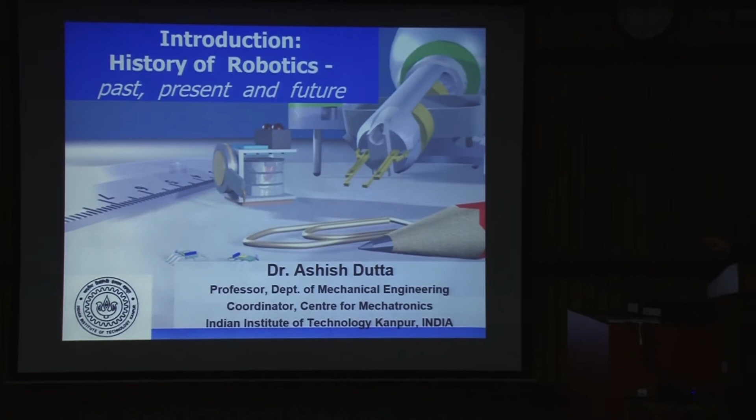Introduction to robotics: past, present, and future. There is a lot of talk of robotics, this word robot is used extensively. You look at TV, newspapers, there is always something or the other to do with robotics. Now it's very interesting to note that when somebody uses the word robot, or you read the word robot somewhere, what is it that first comes to your mind?

Each of us has a different perception. Some people will think they are mechanical machines, some would think they are companions or friends, some will think they are pets and toys like this. Some would even say helpers, some will say dangerous machines. So maybe all of this would come to your mind.

It's very interesting to note that as time has progressed, our concept of robotics has also evolved. In the 1960s and 1970s, there were mechanical machines doing jobs in industries. Then a little more advanced, we have robots which are friends and companions. You have robots today in other areas also: social robotics, companions, friends, pets, toys, helpers. May not be so much in India, but in other countries, helpers are already there, for rehabilitation and so on. Then there's another one becoming very common: dangerous machines, for example automatic weapons, drones. These are all robots, and they are dangerous machines. So depending on what you're thinking of, something specific comes to mind about robots.

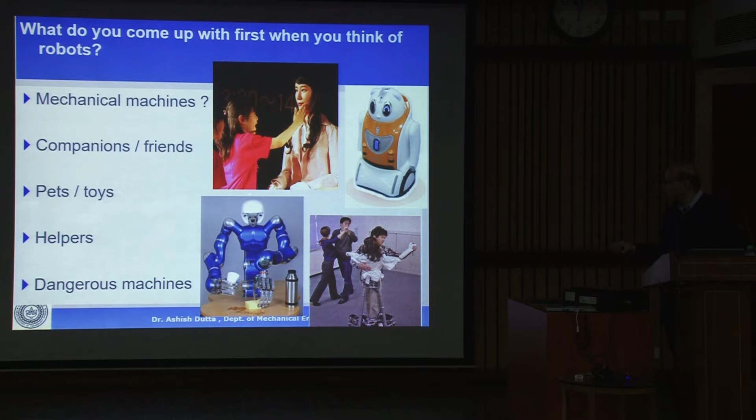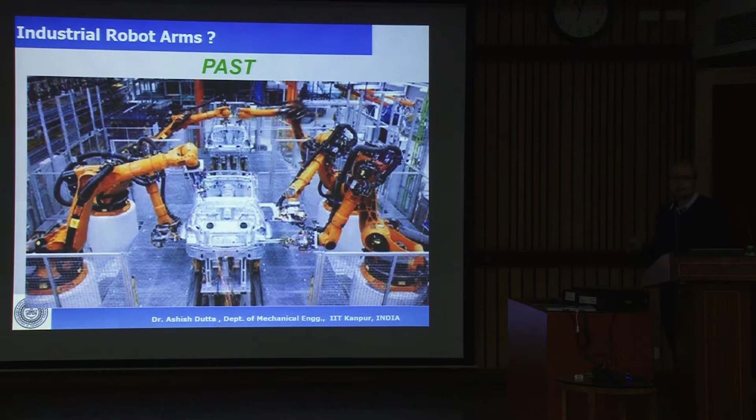Now this business of robots has moved on from the past, present, and future. Why this is important: the past is where it came from, this is industrial robotics from around the 1960s, 1970s. A lot of robots doing a particular task in an industry like the automobile industry or electronics industry. This is the past. Robots were essentially used to replace human muscular power in industries. And then this is the present.

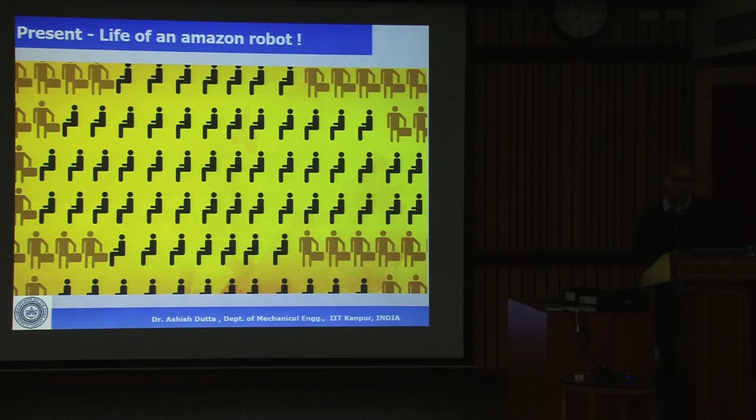The present is basically Amazon. Unfortunately the video is not playing, but anyway, the present is basically Amazon. You might have seen the video. In Amazon robotics, there are robots which are used almost everywhere, right from material handling to other tasks.

I insisted on showing this video because it actually shows that we are connected to robotics in almost every way. We might think robotics has nothing to do with us, that it's just some subject somewhere. But if you look at Amazon today, or most online retail services like Amazon, Flipkart, and others which we are using, all of you would have used Amazon or Flipkart in some way. Now the material handling in this automated online retailing is completely automated. This is the present, and this is also the future of retail.

So we are all connected. When you buy something on Amazon, you place an order. The order is processed automatically, and then from wherever the product has been placed, it is retrieved automatically by using a robot and then dispatched to you. The full process is automated, and this is where we talk about robotics in terms of motion planning, material resources, material planning, and delivery.

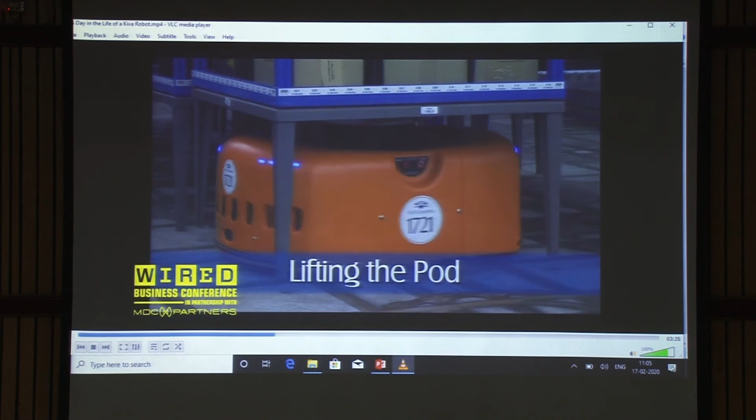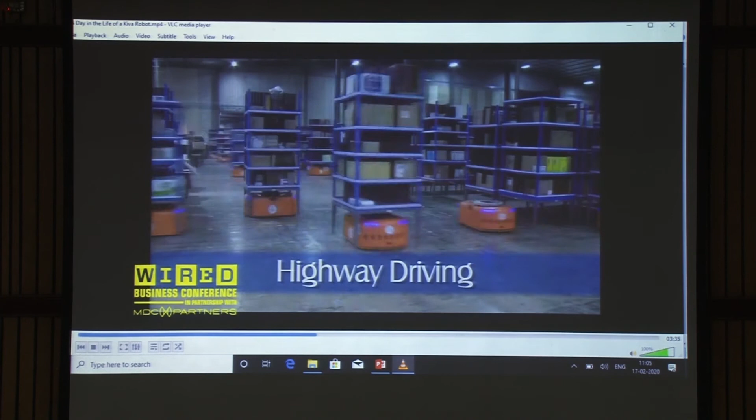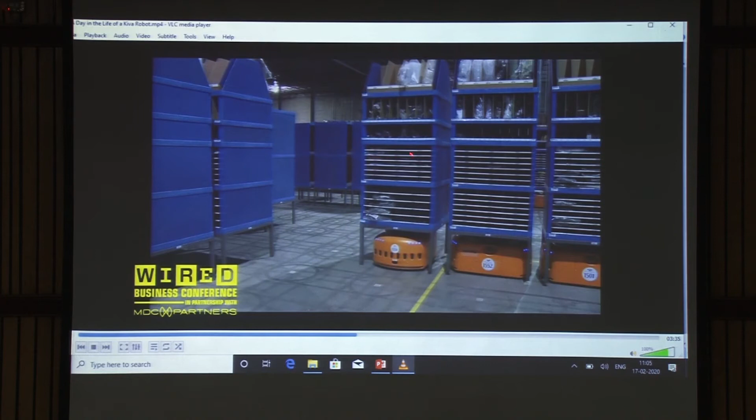Now this has to do with mobile robots, it has to do with motion planning. You can look at the design of the robot which is essentially retrieving the part. In terms of motion planning, there are about 3,000 robots working simultaneously. Now if there are 3,000 robots working simultaneously, how are you going to do the motion planning? Obviously it has to be the fastest, you have to have a plan such that the robots don't hit each other, and it must give you the fastest delivery time.

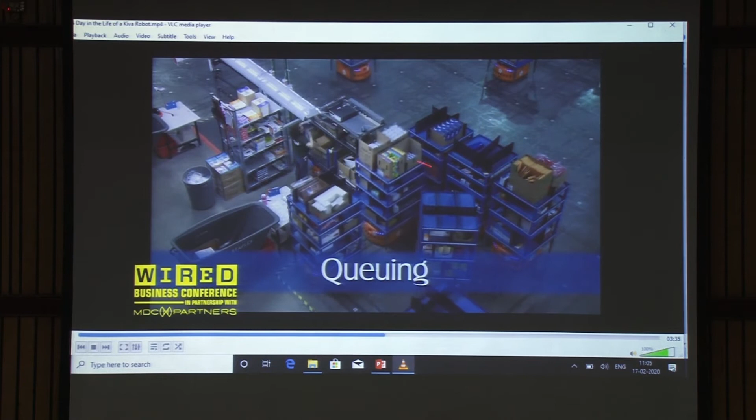So this is something we may feel we are not connected to robotics, but we are in a way connected, because the product coming to you is actually being automated and given to you. In terms of retailing, this is the future of retail. So what the human being will do is only take the part, put it in the packet, and give it to you. The rest is completely automated. This is the present, and it's likely to be the future also. So we are all connected to robotics in some way; we don't see it directly, but it's already there.

So I insisted on showing the video because this at least convinces people that yes, we are connected to robots, and this is the way forward.

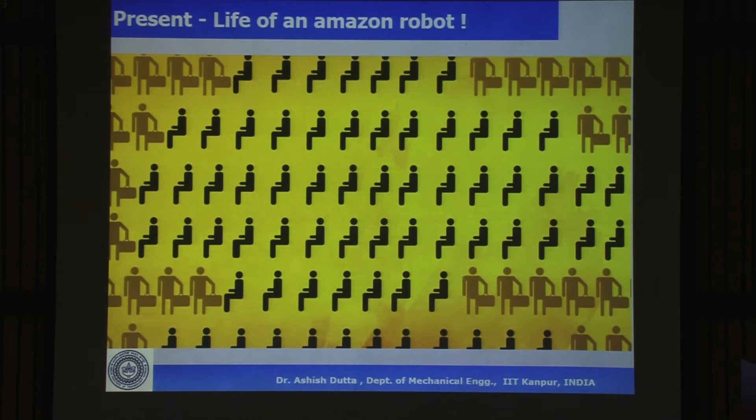So the past was this, the present is this, Amazon, retail, et cetera. Now in terms of the future, many countries already have concepts like social robots, robots living in society, in rehabilitation, healthcare, hospitals, airports, giving directions, as helpers, teachers. These are already there in so many places. So this is the future, this is probably the direction in which robotics is going to go, from industrial applications to online retail to the direction of social robotics, where robots are actually going to come and live in society.

Now essentially robotics is not only a question of looking at kinematics, dynamics, control, motion planning. Other aspects like behavior have also come inside. What should the robot look like? Should the robot not look like you? Should the robot look like a human? Should it not look like a human? Should it behave like a human or not like a human? Which things were not there before?

It's there today. So in robotics, all kinds of people have got involved. Apart from the engineers, we have people from social sciences, from humanities, from psychology. Everybody is included in robotics today. So robotics has actually become a very, very large discipline by itself, and that is the direction in which it is going.

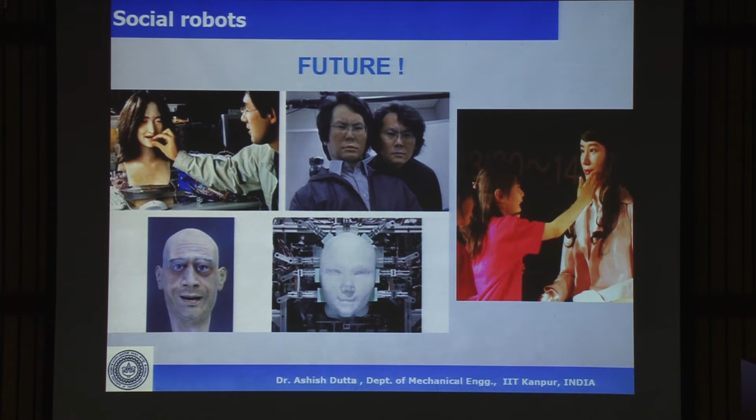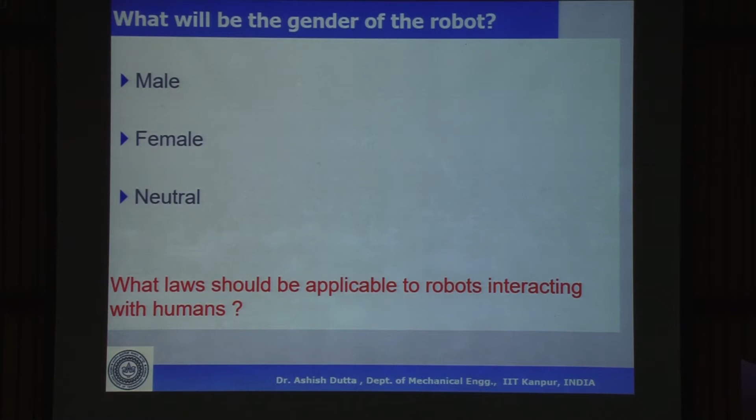A lot of interesting questions have come up which never existed before but which are there today. For example, when you think about a robot, what will be the gender of the robot? Will it be male, will it be female, or will it be neutral? These questions did not make any sense, say, 20 years ago. But today it makes sense, because if there is a robot that you're going to buy, or that is going to be there in the airport or in the hospital, then what should be the gender of that? Will this ever come to your mind? So these kind of things make sense today, which were not there before.

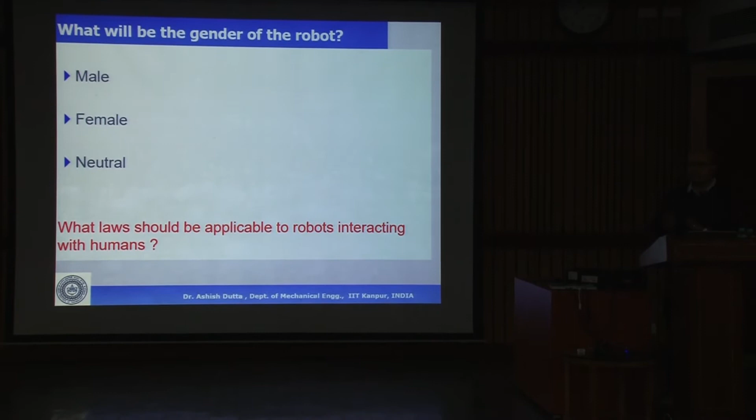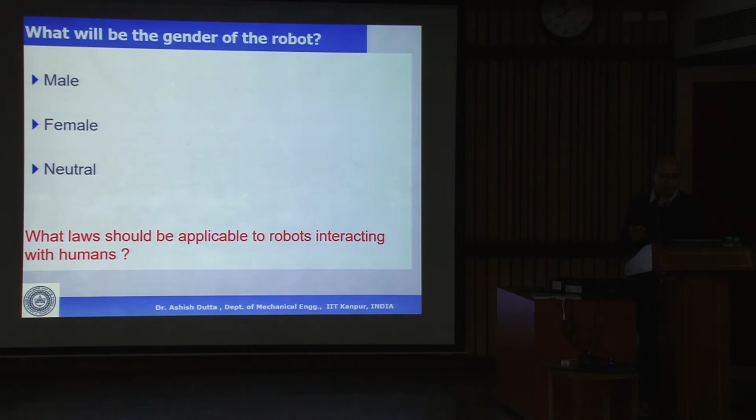So this discipline is progressing, and it is likely to go on for the next 20 to 30 years at least, where we are going to automate a lot of services and industries. So what we'd like to know here is, in terms of teaching, we should be very clear where robotics came from, where robotics is going, and what is the future of robotics. So what we'll be trying to cover is where did robots come from, where we are in terms of robotics, and where robotics is going.

Why should we know this? Essentially because when you're doing research, you should be very, very clear about what the research is going to be in the next 10 years or 20 years. So starting off from the very basics of this course, that is the origin of automation.

So robotics is a part of automation. And what is automation? Again, these are terms we use very commonly. When we say automation, home automation, industrial automation, what is this automation? The definition of automation is essentially replacing human muscular power. So robotics is a part of automation, and automation is the process of replacing human muscular power. So we can have office automation, home automation, all kinds of industrial automation, and today we have retail automation.

So the objective is essentially replacement of human muscular power, and this business of automation has been going on for thousands of years. It is not that anybody invented automation, this is a process which started off very long ago. For example, 10,000 BC, in the early days, human beings used different kinds of tools. We had copper tools, stone tools. Initially it was stone tools, then copper, then iron, in that order. So tools make better tools.

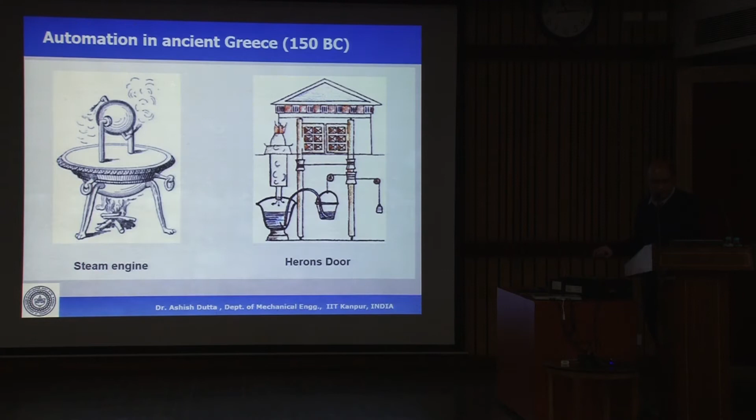In 1800, in terms of progress, we saw the manufacture or design of automatic power looms in France. For example, this gentleman called Joseph Jacquard invented the first textile machine, or the programmed textile loom, for design and manufacture of textiles, that is, clothes. Even today we use this kind of device when the weaver weaves.

You would have seen there is a structure like this, with threads which go in this direction, and threads which come from the top. So how does the weaver actually make the design? By changing the position of the threads coming down, the person makes the design in the cloth. This is the way it is done even today. You would have seen on TV very often: there is a bar like this, and the person holds the bar and pulls it down, changing the position of the threads, and that makes the design on the cloth.

So what this gentleman did is that he embedded the design that was to be made on the cloth in the form of a program which he wrote in a punch card.

So this punch card is something similar to our OMR sheets of today. In this punch card, there would be lines, and each line will have circles. So there is a hole or there is no hole. And there would be a reader which can read that. If there is a hole, probably it means 0.

If there is no hole, it means 1. Either way, this is something similar to the cards we use today, the OMR sheets, where you make a circle, make it black or don't make it black, and there's a reader which reads that.

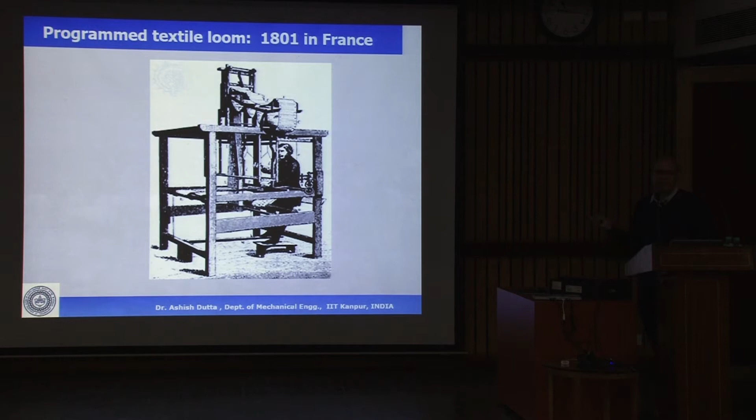The program made for having this textile, making the design on the textile, was written in the form of a punch card. This machine could read the punch card and correspondingly change the position of the threads. This is the earliest example of a program device. The early machines, computers and NC machines, also used this punch card in the earlier days. So in terms of program, the earliest example is probably around 1801, in the form of textile machines.

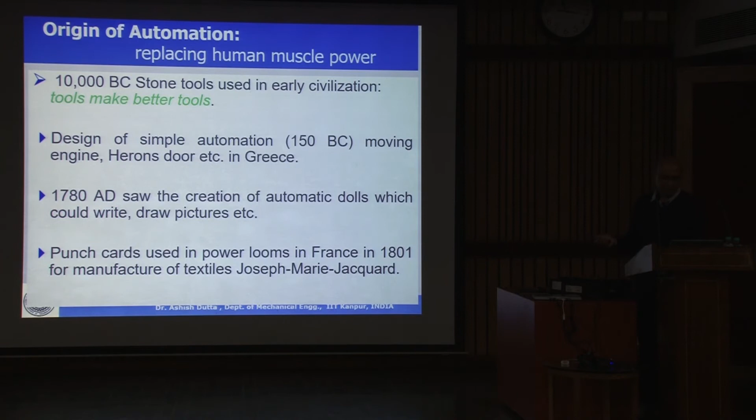Now we move on further. 1904, essentially, there was an idea of using transfer lines. This first came out in the Ford Motor Company in the US, 1904. So what we are trying to see is historically how this subject of automation has changed, and where robotics came from. This is all hard automation till now.

1904, Henry Ford's mass production of vehicles in the US, and even today we use this concept of transfer lines. There is a conveyor, there is a car which sits on the conveyor and it moves from station to station. At every station, a human being or a robot will do something, and then the car moves on. So the idea of a transfer line was 1904.

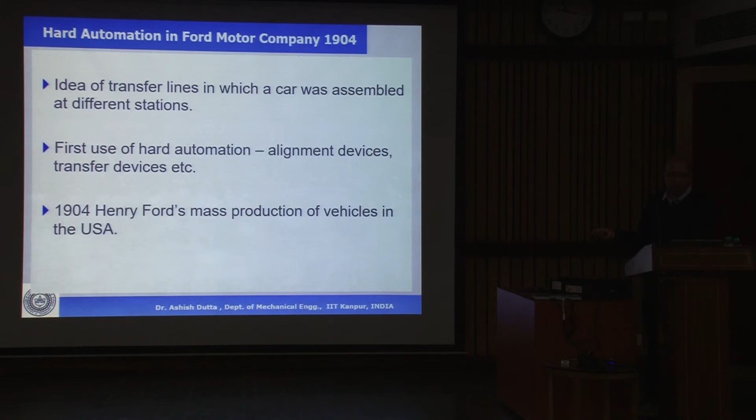Now, historically speaking, where did the word robot and robotics actually come from? You will be familiar that the word robot first came about, first used by this gentleman called Karel Capek, who wrote a play in 1921. This is supposed to be a picture from his play. He proposed that in future there will be mechanical men who will be replacing human beings to do dirty jobs in industries. He basically called them mechanical men or slave men. So 1921, the word robot was first used, and it basically means mechanical men or slaves in the Czechoslovakian language.

So the word robot was used in 1921 to depict this kind of device which will replace human beings in future. Of course, there were no robots in 1921. Then in 1942, Isaac Asimov first used the word robotics. So we are seeing how automation progressed, then the word robot was used in 1921, and then we had the word robotics, used in 1942 by Isaac Asimov.

There are a lot of books, a lot of science fiction books, a lot of movies. I don't know how many of you have seen. Has anybody seen or read any of the movies based on Isaac Asimov? I, Robot is there. There are so many of them.

He is the person who actually said that in future there will be a subject called robotics, and he also wrote a lot of science fiction about what is likely to happen in the next 200, 300 years.

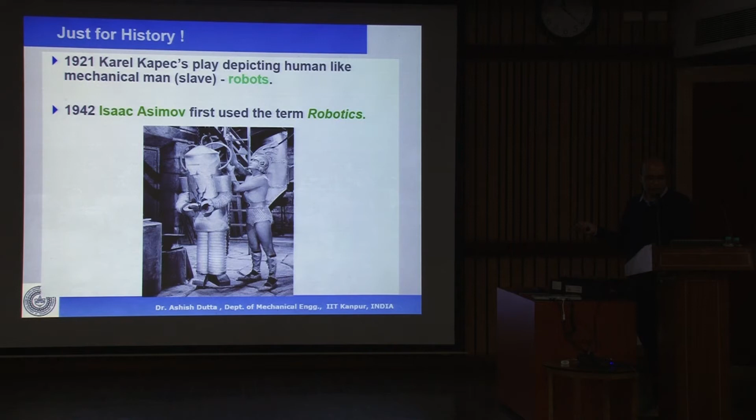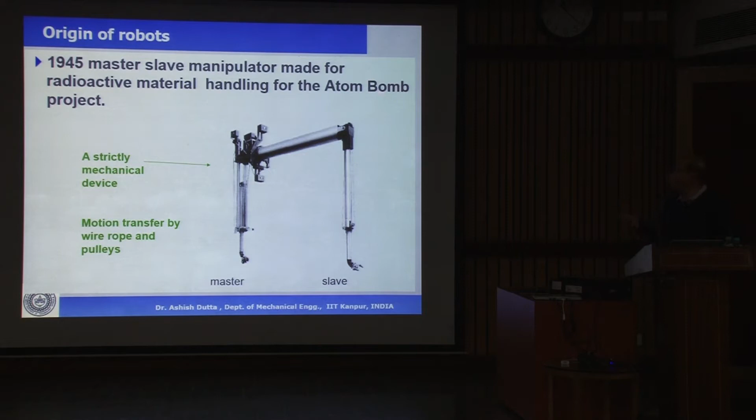Now, 1942, the term robotics is first used. 1945. So till 1942, there were no robots, of course. So where did the robot actually come from? So in 1945, during the Second World War, there was a need for making devices which can handle material at a distance. For example, during the atom bomb project, because of handling radioactive material, they had to make a device by which they could manipulate this material at a distance, or telemanipulation.

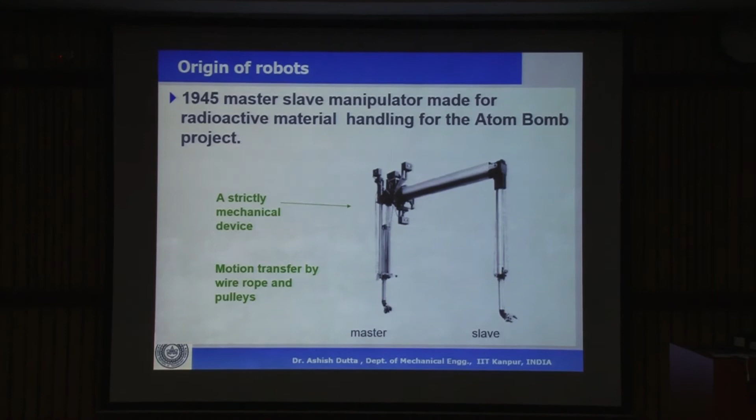So this is a device which is called a master-slave manipulator. And it is made such that there are some joints there. And this is placed in the hot cell, which is at a distant location with the radioactive material, quite a distance. So maybe at least there would be a gap of 10 to 15 meters between them. And there would be heavy shielding, either brick wall or other kind of concrete, and there would be a small hole by which the person from here can see that side. And it could do very simple motions.

How does it work? There are joints, and these joints are connected by wire ropes and pulleys. This joint is connected this way to the other joint there. So the master is where the operator stands. So the operator will stand here. He will hold this and move in a particular direction. So if you move it this side, what will happen? The tension on this cable will change. The tension will be propagated on this side, and this joint will also move. So whatever is done this side is replicated on that side.

Very simple motions. Just move, maybe catch something, put it somewhere. It could not do very complex motions. What is a complex motion? For example, moving an object like this is complex. So it can't do that. But it can simply catch something, put it somewhere, pour some liquid, that it can do.

Something to note here is that this is a mechanical device. So the motion transmission is by means of wire ropes and pulleys. Essentially the motion from here goes like this to the corresponding joint on the other side, and the transfer is by means of wire ropes and pulleys. So there is no program here, there is no electronics, no sensor, actuator, nothing. So this is the father of the robot, 1945, which is called a master-slave manipulator.

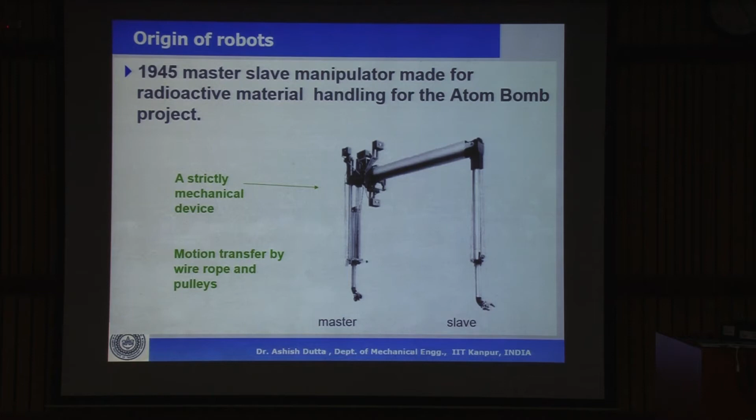So where did the robot come from? Now, what we are trying to see is that technology has progressed in particular steps, in stages. In terms of robotics, there are three main stages that happened, three main inventions. What are these three? The first one, which changed everything, is the invention of the transistor, 1948-49. Before this, everything is mechanical automation. There is no program, actuator, sensor, and there is no reprogramming. You cannot reprogram a mechanical device, like a master-slave.

But once you had the transistor, from the transistor we ended up making the computer, then the microcontroller, microprocessor, in that order. So basically the first major change that came about in terms of technology is the invention of the transistor in 1949. And with that came the concept of reprogramming. You could reprogram a device to do something.

NC machines and robots essentially have the same technology. What I mean is that they all come from microcontrollers only. The control system of an NC machine and that of a robot is essentially the same. There's no difference. NC machine means numerical control, which means control using numbers. A robot also you're controlling using numbers only. The only difference is a robot arm moves around; you give position coordinates. In an NC machine, you say the tool moves X, Y, Z in a particular direction, but it's numbers. And the technology is essentially from here only. It's microcontroller based.

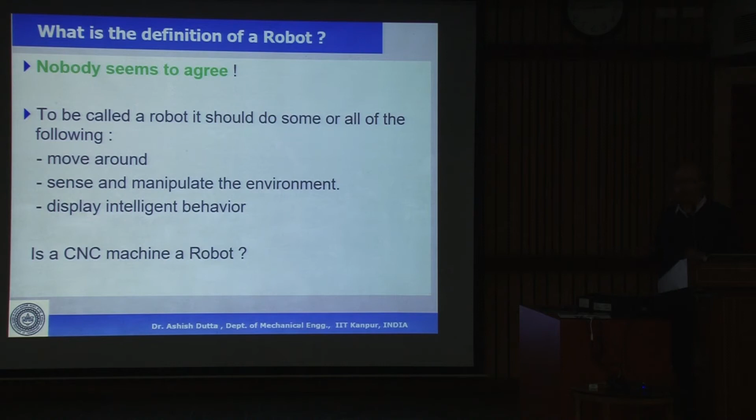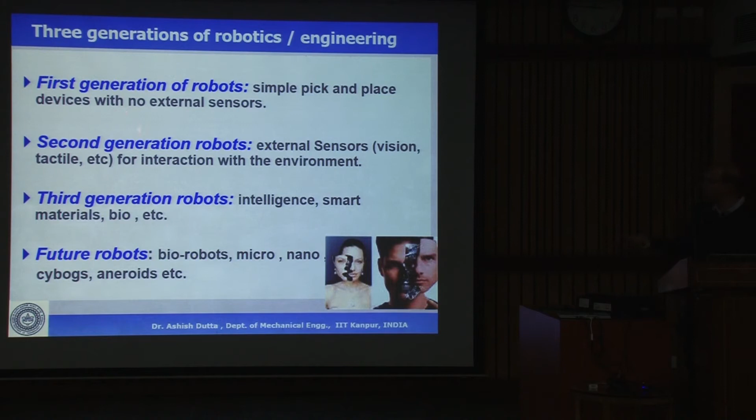So this is 1960s. This is about 1970s. Then this is 1990s and beyond: intelligent robots, smart materials, bio-based, third generation. And then we have future robots: biorobots, micro, nano, cyborg, androids, etc. This is about 2000 and beyond, or maybe 1995 and beyond. So essentially it is the sensory interface which has gone up, and some kind of intelligence has come into the system. Based on that, we are classifying the different kinds of robots.

Now, the second major change that took place, the first being the invention of the microcontroller, is that electronics became faster, smaller, and cheaper. About the 1970s, we had the development of VLSI, very large scale integrated circuits. In integrated circuits, on one board you could put all your circuits and have a very small device. And that is essentially what made electronics smaller, faster, and cheaper. All the electronics you see today, mobile phone, camera, laptop, everything is the result of that VLSI, 1970s.

Electronics has become really small, fast, and cheap. Because of this, the use of computers everywhere also increased. With this, we had external sensors, interaction with the environment, vision, advanced sensors like gyros, inclination, force, slip. We have advanced controllers like microcontrollers, DSP, FPGA, and whatnot. Then we had speech recognition, AI, in that order.

About 1970s, because of this VLSI, essentially we have different new disciplines which came up, because the computer became smaller and could be used more freely. Vision, camera was there even before - it's not that camera was invented in 1970s. Camera was there much before, but the computer was so big, the camera was so big, that it was too expensive and too difficult to use on a robot. So the device existed, but the application did not. The application essentially came about from here.

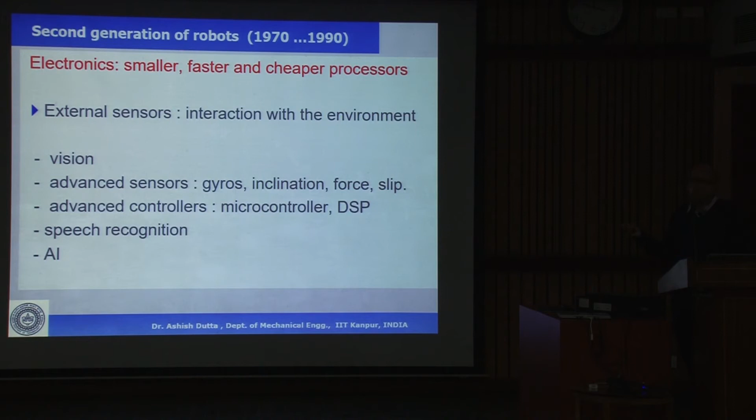Electronics faster, smaller, cheaper, making this 1970 onward, we have the second generation of robots, and we had the robots interacting with the environment. The third generation is essentially new materials. About 1990s, people started wanting to make machines which are very small, micro, nano. And in that case, the conventional actuator sensors were not enough, so they had to make it smaller. Now the conventional actuator sensor, like a DC motor, cannot be made small beyond a certain size.

It won't work. So you have to use something else as an actuator sensor. That is where, in the 1990s, we have the smart materials-based actuators, smart materials-based sensors. By using these material-based sensors, actuators, links, we could make very small devices. And that gave rise to the third generation of robots, which are essentially called micro, nano, then vision-based, biorobots. All this came about because of this only. So the first was microcontroller, second is VLSI, third is materials. Because of these materials, we could end up having micro robots, nano robots, vision-based, biorobots, etc.

Now, something interesting to note here also is that about 1990s, people wanted to make small robots, micro, nano. One way was that you take a big device and you shrink it, and you'll get a small device. For example, I have a lathe which is the size of this table, but I want a small lathe. Why do you want a small lathe? For example, you want to cut very little, only 0.1 mm. You want to make a very small device, and you want to cut 0.1 mm. So I make a very small lathe. Otherwise, if you want to cut 0.1 mm with a big machine, it's a waste of time, space, everything. So one way is you take a big lathe, shrink it, and make it into a small lathe.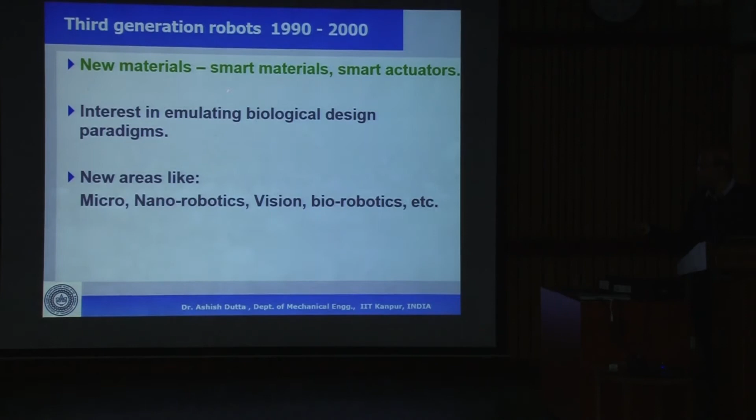And that is where this business of using materials-based actuators came in. The conventional actuators cannot be used after a particular scale, and we need to have different kinds of actuators for going into the micro, nano domains.

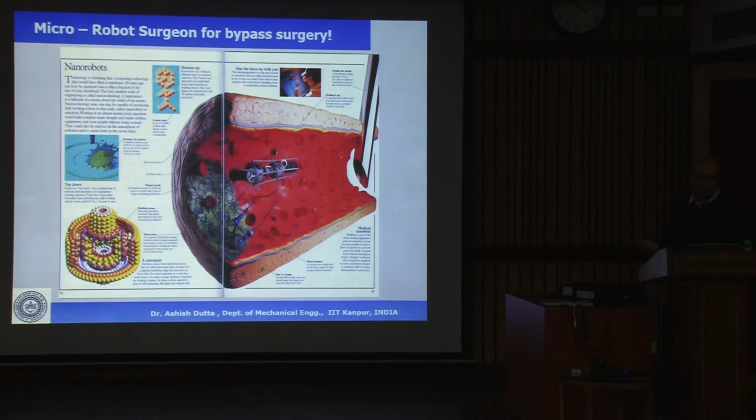So that is where this came about. From 2000, we have been going into very small domains. How small is small? For example, here we go inside the blood vessel and do something. We are already at that scale where a robot can go inside the blood vessel, do some operation, and come out, few millimeters.

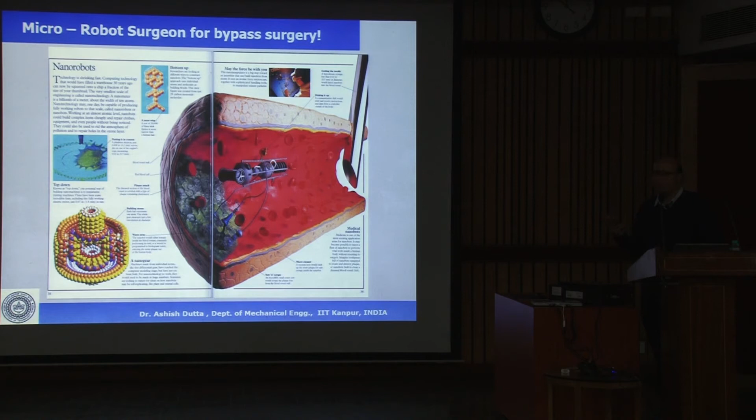When we are talking of this scale, the conventional AC motors, DC motors do not work. We have to use something else, and that is where the materials-based actuators come in. All kinds of funny things have happened—micro dentist, small robots which can clean your teeth, then robotic haircut.

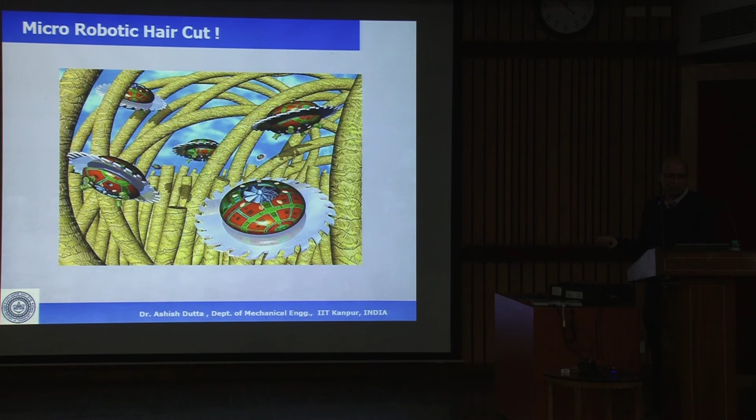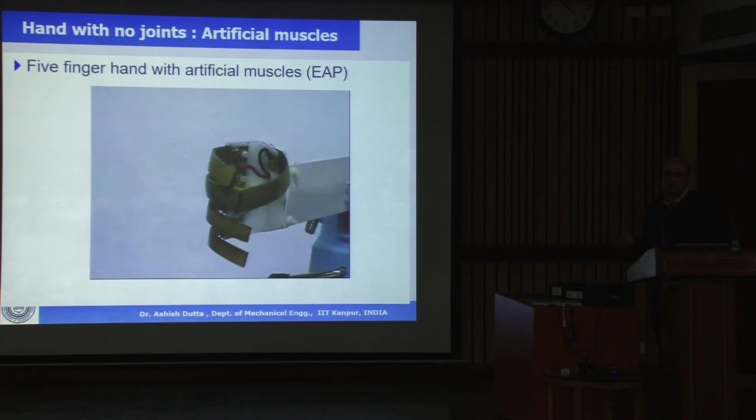So when we talked about smart materials-based actuators and sensors, we talked about something like this. This is a device, this is a hand, but it does not have any actuators, sensors, or linkages like a robotic hand, but it still behaves like a robotic hand. This is materials-based, basically an artificial muscle, electroactive polymer, by which the fingers are made, and it simply can contract and expand.

So here basically we can give it a particular charge, and depending on the charge, it will bend either this side or that side. This is an example of a smart material-based actuator-sensor system, where we can make devices which are not the conventional mechanical linkages.

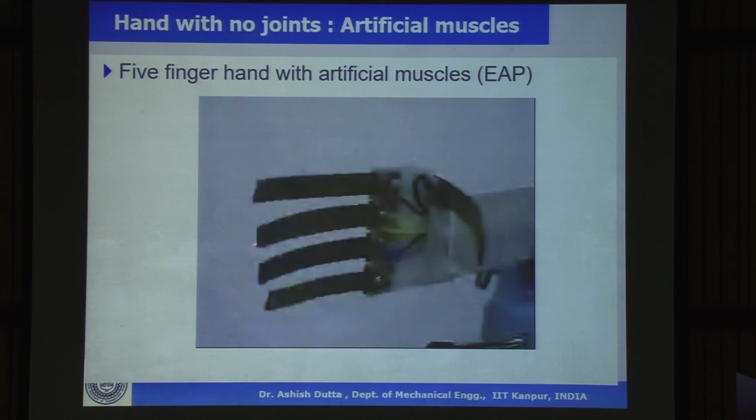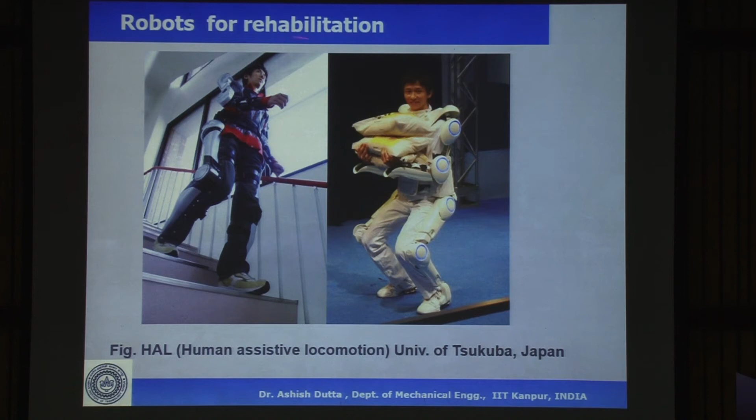These are some examples of futuristic robots. One is robots for rehabilitation, wearable robots. Then we have automatic transport, for driverless buses, automatic cars. Somebody will talk about automatic cars, electrical cars. So autonomous transport is a robot in a way.

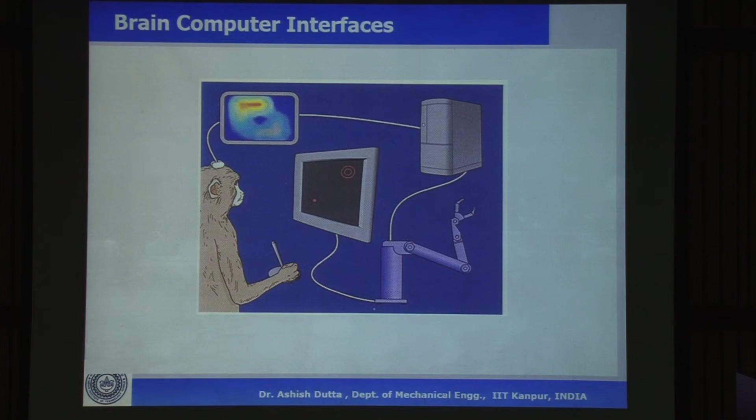Some of them are existing now, like driver tracking for automatic cars, which is a vision-based application. A lot of this is already there, or it is actively being researched by various companies and researchers.

So with this, we looked at the basic definitions of where robots came from, what is automation. We looked at how historically there were inventions—microcontrollers, then VLSI, then smart materials—based on which we have the current state of robots. So after this basic introduction, let's move on to more serious talk.

So we will revise some of this—robot joints, work volume—before we move on. Some of you might have done this before in an undergraduate course, so it could be a little boring, but please bear with us. We'll go through this very quickly. A robot is made up of linkages connected by joints—these are joints, this is a linkage.

There is an end effector or gripper, and the base is fixed. So a robot essentially has a structure made up of linkages connected by joints, with an end effector there, and the base fixed. It is controlled by means of a controller, which is either PC based, microcontroller based, or DSP based.

So the fundamental thing here is that there are linkages connected by joints. You can have different kinds of joints, and each of these joints corresponds to a degree of freedom. When we say degree of freedom, we essentially mean the free variable on a particular joint.

The first kind of joint is a prismatic joint. A prismatic joint is a rectangular part mounted on a rectangular rod. This can move up and down, but it cannot rotate, because it's rectangular. This moving up and down is one degree of freedom, a straight line motion, so we say this is a translating degree of freedom, where the distance is the variable. This joint is a prismatic joint, with degree of freedom 1.

The second is a revolute joint. This is a cylindrical part mounted on another cylinder, with an axis. This can move up and down like this about this axis, so the angle is the variable. Every joint has an axis and a variable. This cylinder is mounted on another cylinder, with a stopper to prevent it from coming down. So it can rotate about this axis, and the variable is the variable angle. It also has degree of freedom 1, and it can rotate about this axis but cannot come down.

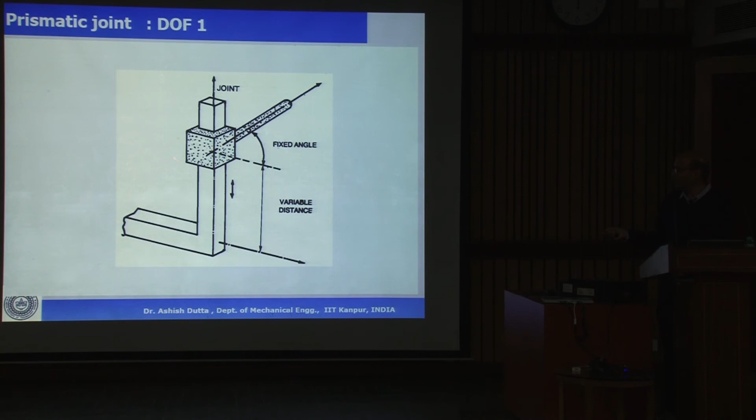They're not made with any other kind of joints. If you have a translating motion in an assembly, then you'll need a prismatic joint. So either it's prismatic or it is revolute—99% is revolute. But if you look at biological systems, the hip joint, shoulder joint, they're all ball and socket joints. So it would appear that this is a better joint because you have more degrees of freedom, whereas in robotics, we are essentially using revolute or prismatic joints.

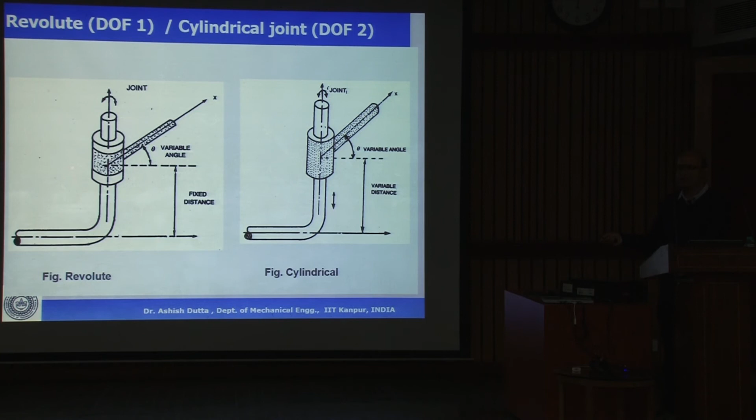So what is the problem with this one? What is the problem in controlling it? Why? Human beings are so capable, we can control our hand so nicely—what is the difficulty? More motors required, yes, but so what? You are getting more motion. Then why not use it?

It is always required. See, our hands, we can move so nicely because this is a ball and socket joint. If it was a revolute joint, then you'll have only 1 degree of freedom.

No, making it is very easy these days. With rapid prototyping, you can actually make this very easily. You have spherical bearings which are there, right? So how it is done: this sphere is made, this one is made, then this is heated, and then it is inserted. Or you're making it in 2 parts and then laser welding them. Or you make it in rapid prototyping where there is a small connection between the parts, and that small connection is just removed. So making is very easy these days. Spherical bearings are available today. Bearings are there. But then what is the problem?

Why? See, logically, it is giving you maximum degree of freedom. That is why biological systems are having this. Our designs are optimized, and we are able to move so nicely because we have these joints—it gives you maximum degree of freedom. So in a robot, we should be doing with this one. Why do we do with this one instead?

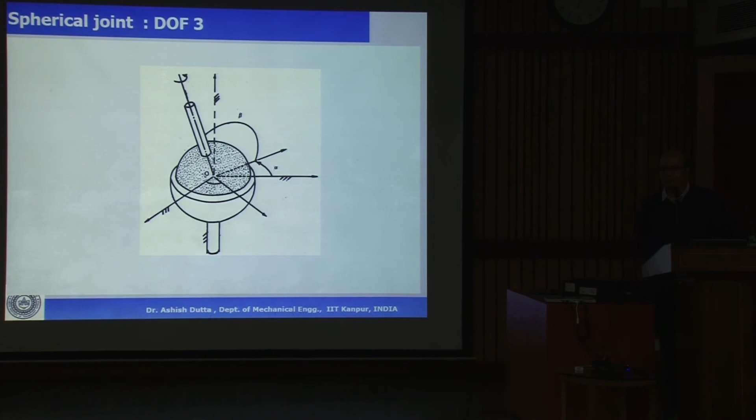No. The manipulator is designed exactly like your hand. If you look at the structure of the manipulator, it is exactly the same. Only it has less degrees of freedom because the joint is revolute. This one has more degrees of freedom because this is a ball and socket joint.

No, a human hand can carry much heavier load than a robot of the same weight. In fact, the weight ratio is the reverse. A robot which can carry 10 kg will weigh 50 kg, whereas a human hand which can carry 10 kg weighs only maybe 3-4 kg or 5 kg. So it is much lesser for a human hand. Human design is the best design, right, in terms of load carrying capacity, in terms of self-weight. An ant can carry 20 times its own weight, whereas a standard robot, if you want it to carry 5 kg load, the robot itself will weigh at least 30-40 kg. So it's reversed, and it is reversed because of this only.

But what is the problem? The problem is actuators, yes, but why? Why? So what? Why?

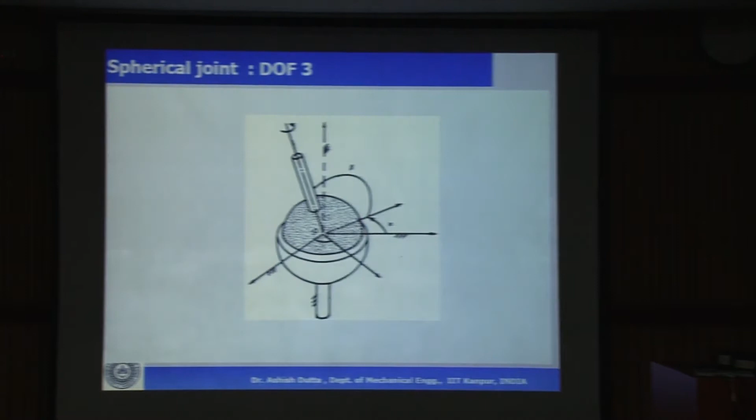See, you have 3 axes which are meeting at a point. So the moment I put 3 motors—1 motor here, 1 motor here, 1 motor here—all the 3 shafts are intersecting now. So if this motor rotates, the others will have to counteract that rotation, otherwise it cannot allow it to rotate, because the axes of the motors are connected now. So there are 3 axes intersecting at that point. If I actuate this motor, this and this also has to rotate, so you will not be able to independently control them. Position control will become impossible here. Although this is a good joint, position control is not possible, because the axes are intersecting there.

So corresponding to a revolute joint, there is one joint and there is one motor—it is very easy, one motor, one joint, you control it, fine. They are not intersecting with each other. Here, there is intersection, so you cannot control the motors independently—they are coupled now. But in a biological system, we are very easily moving our hand. How is that possible now?

The human hand moves very easily. We are able to do this, but a robot is not able to do this, because human joints are not controlled by motors.

That's the answer. If you look at our actuation, they are linear actuation. There is one muscle here, one muscle here. This contracts, this goes up. This contracts, this goes down. So when this contracts, this fellow relaxes. So they are not interacting with one another.

So these are linear actuators, whereas this is a rotating actuator. There is a problem with rotating actuators: you cannot control them independently if they are intersecting like this. We want to have this, but we can't control it.

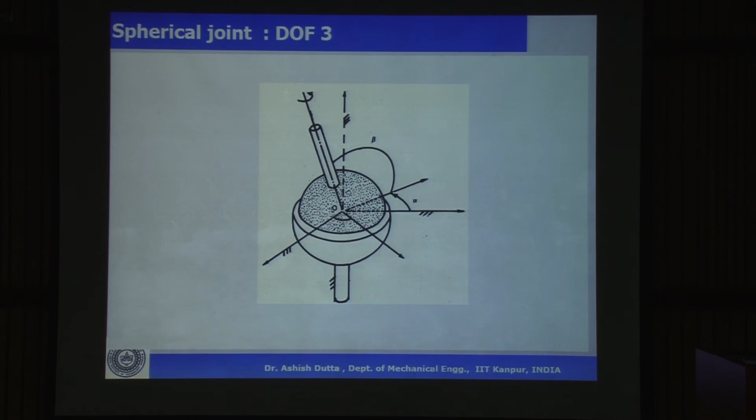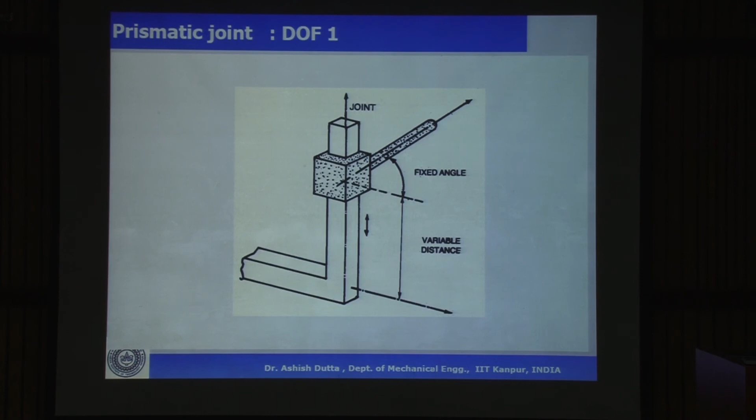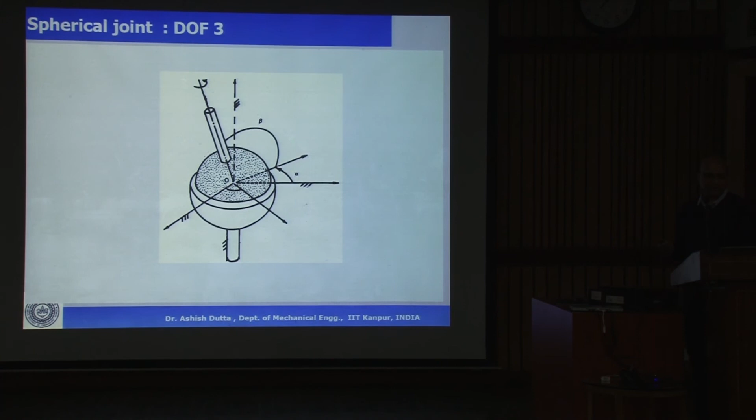So although this is very simple, it has a lot of implications for understanding which joint is useful where and why. Now, in terms of the work volume, we looked at degrees of freedom of the system, that each of the joints has a degree of freedom, and by combining different joints you can make a robotic system. So we understand what degree of freedom means, and how many degrees of freedom are there on the robot.

Now, how many degrees of freedom must the robot have depends on the task. We are talking in terms of building the robot. You decided you'll have revolute joints - there is no other way out, you can't do a spherical joint. So we are going to use revolute joints, or prismatic joints. How many degrees of freedom it must have depends on the task.

So we have a very simple task here. I have this object, I kept it on the table. I want to design a robot which will pick this up from here and keep it here. Very simple task - how many degrees of freedom are required?

So we are trying to understand fundamental questions here. Please do understand that robotics is mathematics, but it is directly correlated to the physical world, so we have to understand this very clearly - what's the degree of freedom, and when something is moving, what is happening in terms of the mathematics also. So my task here is to pick up this object from here and keep it here. Very simple, right? So how many degrees of freedom should the robot have?

So what is the degree of freedom? A rigid object in space has 6 degrees of freedom when it's not in contact. So what are these degrees of freedom? First of all, we have to define an axis now. There is an x-axis, y-axis, and a z-axis, as per the right-hand rule.

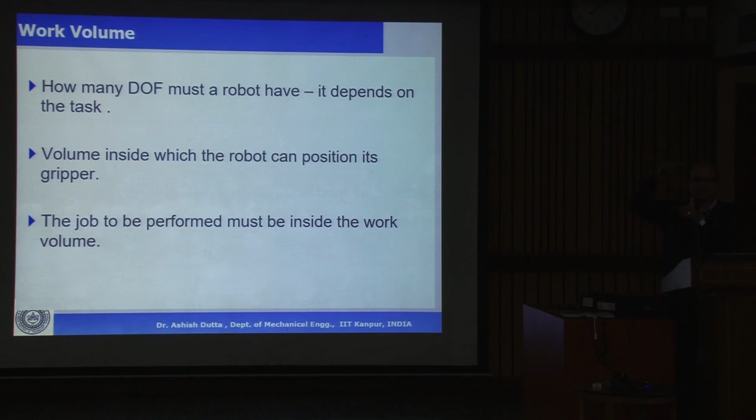So I fix an x-axis, y-axis, and z-axis. Now it can translate about the x-axis, y-axis, z-axis because it's in free space. So it has 3 degrees of freedom, or 3 variables: x, y, and z. Now this can also rotate about the x-axis, it can rotate about the y-axis, and it can rotate about the z-axis. So that's 3 more - 3 translations, 3 rotations, that is 6.

So a free object in space has 6 degrees of freedom. Now if I want to take this object from here to here, how many degrees of freedom are involved? That will answer the question, right? So at most this object has 6. I'm taking the object from here and putting it here. So how many degrees of freedom are involved? Is the question clear?

So this object has 6 degrees of freedom: 3 translations, 3 rotations. That is clear. Now we are saying that we want to pick it up from here and keep it here. So how many degrees of freedom are involved?

You can define the axis. So let's define an axis: x axis, y axis, and z axis. Right hand rule: x axis, y axis, z axis. Okay, I have defined my axis, 3 axes. Now I'm keeping it here. I want to pick it up from here and keep it here.

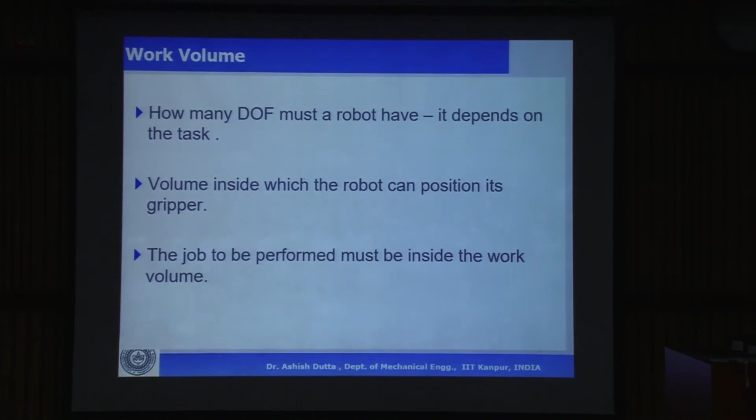Now, the area inside which the robot can position its end effector is called the work area or the work volume. Obviously, the job has to be inside the work volume. So if this is my hand and I want to catch something, provided I cannot move, then the job has to be inside my work volume, right? Otherwise, I can't catch it. So depending on the kind of joints we are using, the work volume will have a particular shape, right?

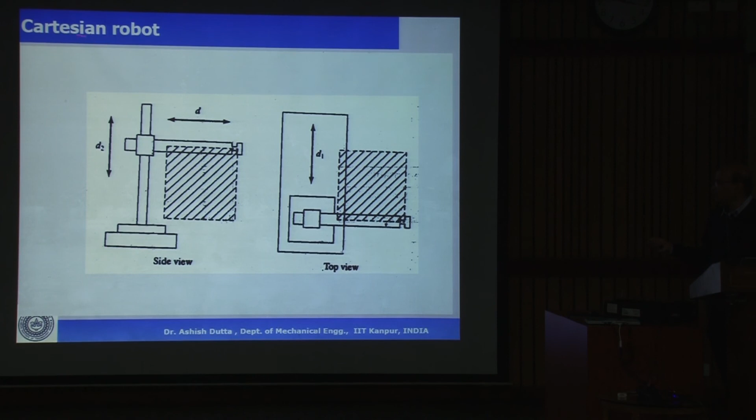For example, if I make it only with prismatic joints, this has 3 degrees of freedom. There is one here, it can move like this, can move like this, and if I see the top view, the whole body can move like that. So there are 3 prismatic joints: 1 is here, 2 is here, and 3 is there. So how do we draw the work volume or the work area?

Essentially, I take the first joint, extend it completely here, and then move it backwards till there. So you get a straight line. It's like the joint is like this, I move it backwards. This is a prismatic joint, but it will move in a straight line backwards. So we get this straight line here for this joint. Then this joint moves from here to here. So this straight line is getting swept like this and coming down till there. So we get this area to be a square or a rectangle, right?

Now, if I see the top view, this square or rectangle on a plane will appear like a straight line from here. So now when I move this like this, what will happen? Again, the same logic. This straight line is getting swept that side. So from the top view, you are getting a square or a rectangle again, depending on the lengths of this and this. So if I combine this and this, what shape will we get? You'll get a cube or a cuboid. If the lengths are all equal, it's a cube, otherwise it's a cuboid.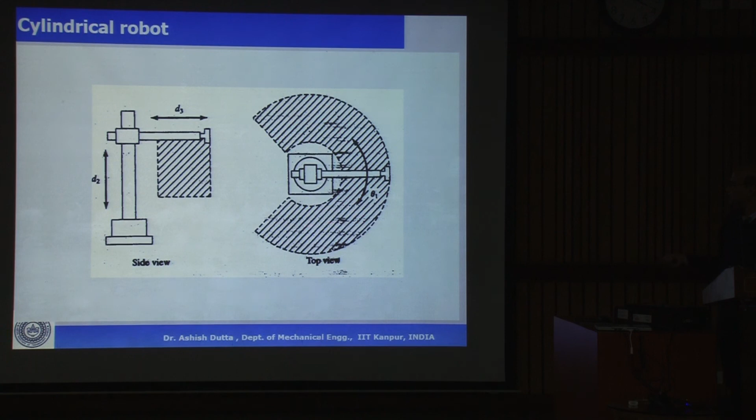So what will be the shape of the volume? It will be a hollow cylinder. Inside area where the robot cannot go, that will be hollow, and this is the cylindrical part. So depending on the joint we are using, we get different shapes. Okay? So depending on the joints, we get different shapes.

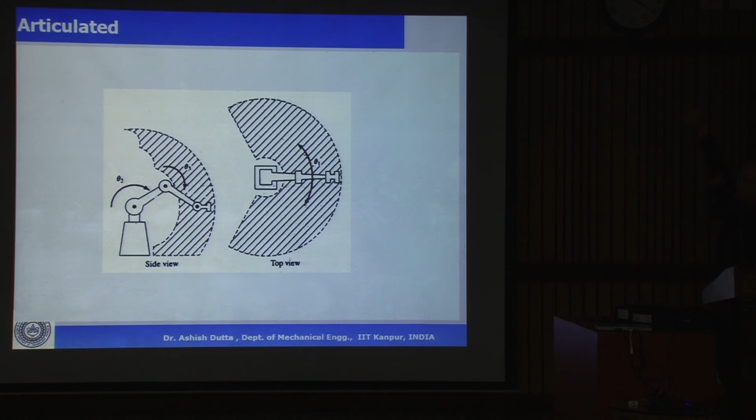And my hand is like this. So there's 1 link, another link, only 2, just for simplicity, and it can move only on this plane. Okay? So it is fully stretched. So then I draw 1 arc, keeping this constant. I just move this joint, I draw 1 arc. So it is here, you get 1 arc. Then I draw this one, I get 1 more arc. Right? If you can visualize. So we get 1 arc here, and we get 1 more arc.

And so I start off like this. I draw first 1 arc, then I draw the second one, 1 more arc. I get 2 arcs inside. And on the outside, when the arm is fully stretched, if I do like this, then I get 1 arc on the outside. Okay? So we have 1 arc on the outside and 2 arcs if this is 2 degrees of freedom. If it is 3 degrees of freedom, exactly the same.

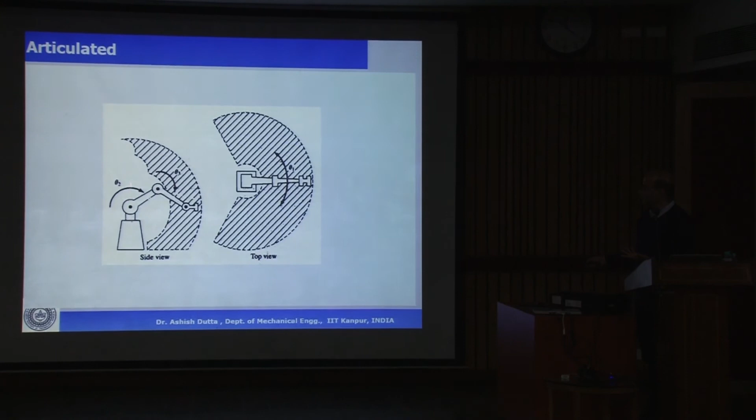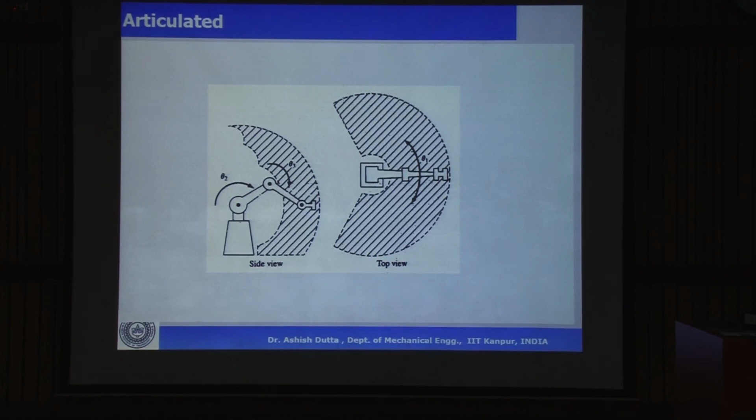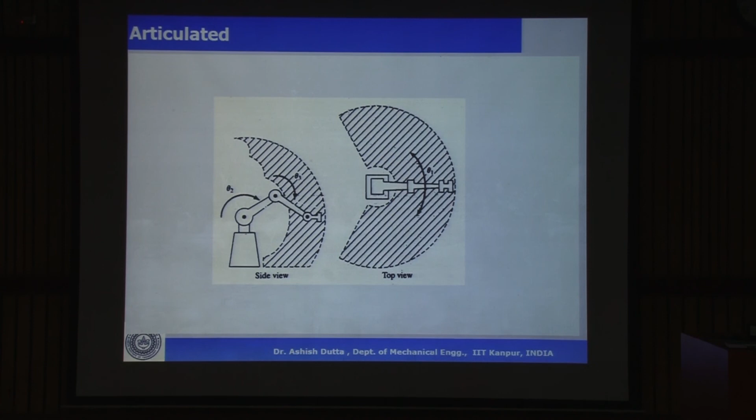It is fully stretched. First this one moves, we get 1 arc. Then this one moves, we get a second arc. Then this one moves, we get a third arc. Okay? So what is the logic? You can visualize and draw very easily for 2 degrees of freedom. 2 links like this. If you draw, first you rotate this one 180 degrees, it comes down like this. You get 1 curve. Then you rotate this one, you get 1 more curve.

So that means 1 curve, second curve inside. And on the outside, if I rotate the full hand like this, I get 1 curve. Okay? Now if there are 3 degrees of freedom, we get 3 curves. 2 degrees of freedom would mean 2 curves. Okay? Outside is always this plus that. Now this one is the top view. The top view, again, it can do like this. Okay? So the shape will be like this.

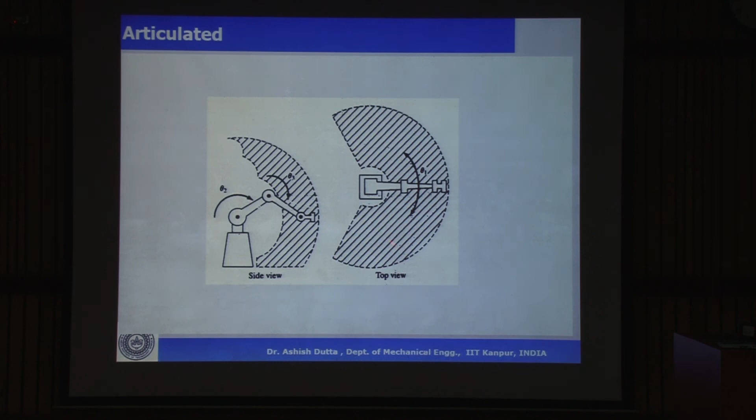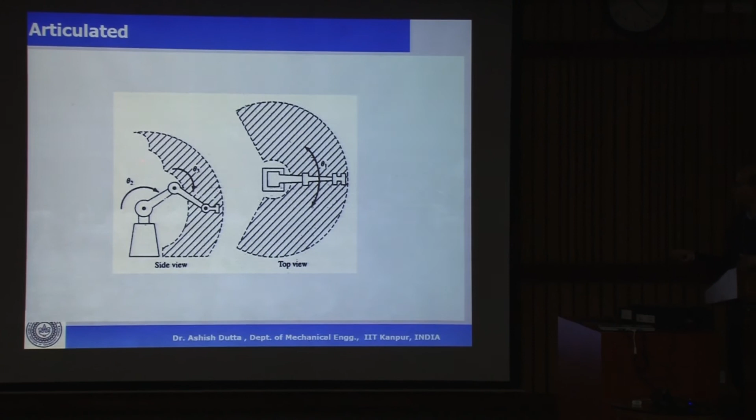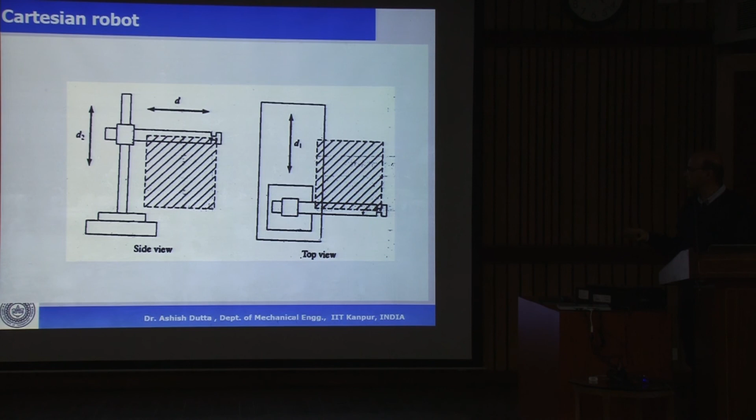So if I combine this shape and this shape, what will be the shape of the work volume? It will be spherical. Inside there will be some region where you cannot go, okay, here, but it's a spherical shape. Okay? So the shape of the work volume depends on the kind of joint you're using. Okay? So prismatic will have cube, cuboid. This will have cylinder. This will have spherical.

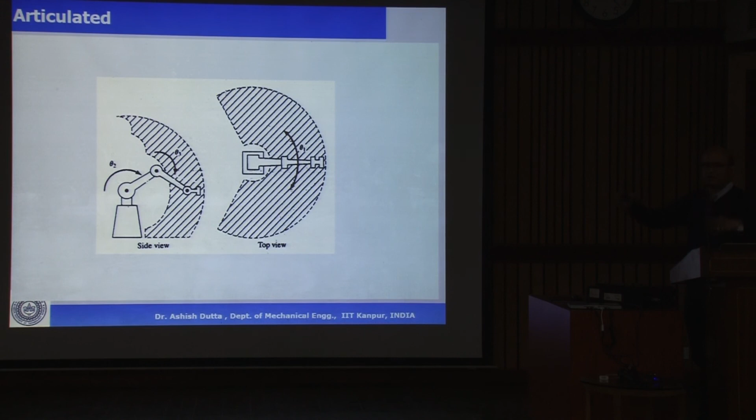So our work volume is spherical. My hand can do like this and like this. So if I combine, it's a sphere. So our hand is having a spherical work volume. Okay?

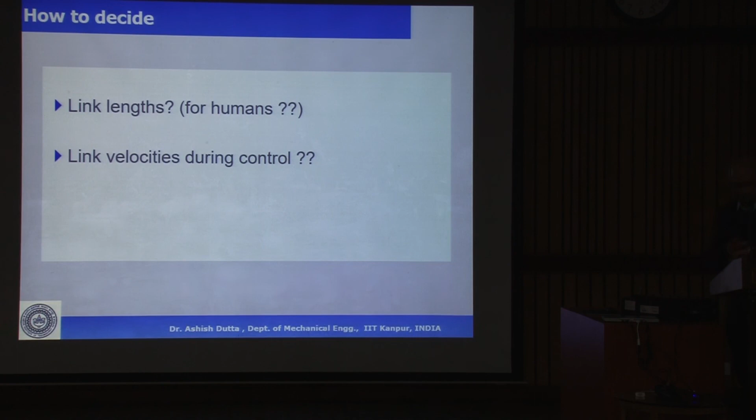Okay. So after this, we have to move on to transformations. I hope this part was clear, right? So please go through the basics of this. Okay? This is very, very basic. What is a degree of freedom? How many degrees of freedom are required? How do you draw a work volume? Okay? Then we can start off with our transformations.

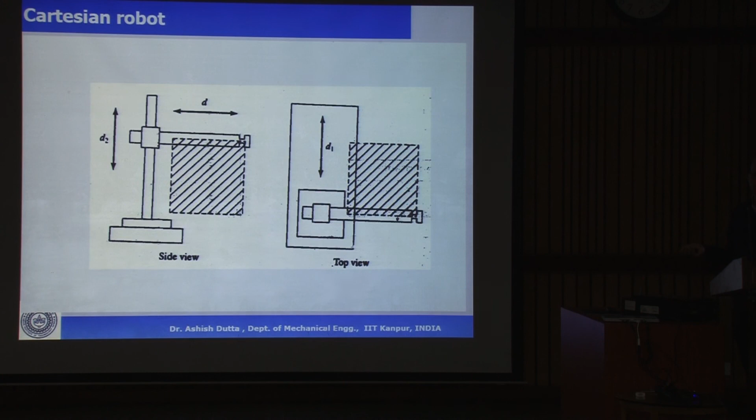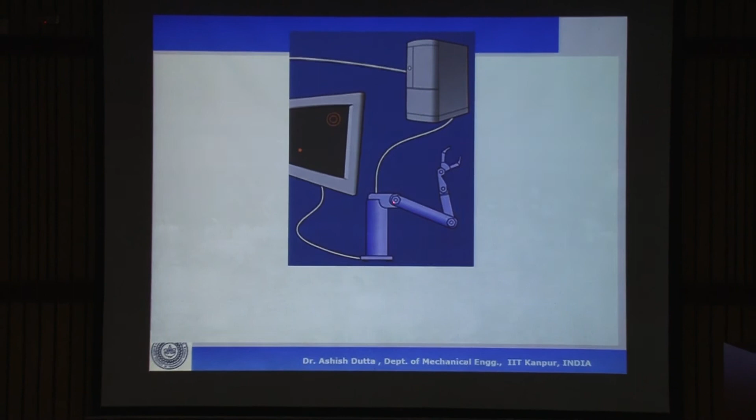Now in transformations, I need to go from one link to another link. The base does not move. So I'm going to assign a frame here, and from this frame, I'll go to that frame, this frame, that frame. So I basically need the transformation from this frame to this frame, then here, here, and there. Because one frame does not move, the base frame, and everything else is with respect to that frame. So I need the transformation that will take me from one frame to another frame, right? And that is what we'll have to see next, when I'm going from frame to frame, what are the transformations involved? Okay.